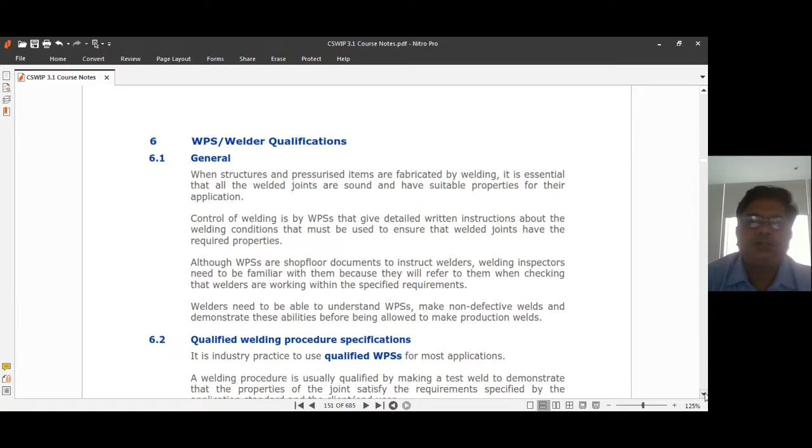So this is our controlling document. We will see all the current requirement, voltage requirement, all the ranges where the input heat calculation - everything will be as per this document. So we will refer to this document for any kind of welding being done by the welder. And also the welder, if he has any doubt, he has to refer to this document to understand about the welding requirement.

So, qualified welding procedure specification - this is the WPS we are talking about. The WPS and PQR are two different documents. You must understand that first - the mother document is the PQR, which the welding engineer will make before the project starts. So before the project starts, the welding engineer will go through the MTO, the material takeoff of the entire project, and understand what grades are mentioned there, what thicknesses are mentioned there, and based on that, he will come up with the PQR list.

So in this list of PQRs, if there are 10 PQRs required, 15 PQRs required, 25 PQRs required for that project, he will make a list of that. Then he will make a list of the PQR material that is required. And of course, you can see my earlier video on this, I have explained it in very great clarity.

So as is the practice to use the qualified WPS for most applications, one PQR may have 10 WPSs supporting that PQR. So this is what the welding engineer or welding inspector learning CSWIP 3.1, 3.2 need to understand: PQR is the mother document that is tested in the lab. Once that PQR is approved, the welding engineer, within that parameter, within that range, can come up with 3 or 4 WPS suitable for welding application on the shop floor, depending on what they are welding.

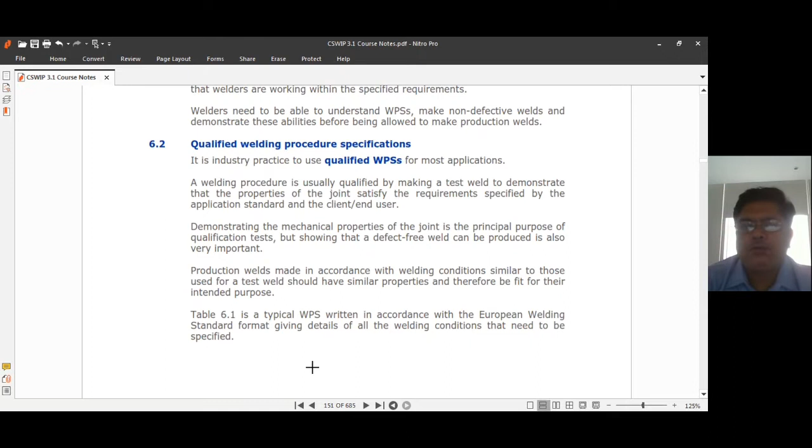And if it is ISO standard, they know what format is to be followed. They know where the current will be, where the heat treatment will be written, where the PWHT will be written, where the gas is mentioned, so it becomes easy and quick. So if every company has their own format, the format is very important for quick finding on the shop floor.

So let's see this typical scope, how it happens: the typical sequence of the welding procedure qualification. So he's talking about welding procedure qualification. PQR is procedure qualification record, so don't confuse yourself with welding procedure specification and procedure qualification record. When we are talking about PQR, it's the procedure we are qualifying, and after the qualification of the procedure, you can have many welding procedure specifications from that PQR.

So the welding engineer writes a preliminary WPS, we can say preliminary PQR, for each test coupon to be welded.

We usually call it PWPS because before it becomes a PQR, it is in the form of a PWPS. The welder makes a test coupon in accordance with the PWPS. The welding inspector records all the welding conditions used to make the test coupon, which is the as-run condition. What current you used, what voltage you used, every pass, root pass to hot pass to fill and cap, every pass we are taking the run sheet.

If you see a typical run sheet, I will just post it here so that people will know exactly what a run sheet is. It's a very, very difficult job. We have to stand there till the complete welding is finished, and the welding inspector, with the help of a tong tester and a digital temperature monitor, will monitor the conditions of the welding. People usually prefer CSWIP 3.1 candidates for such a task.

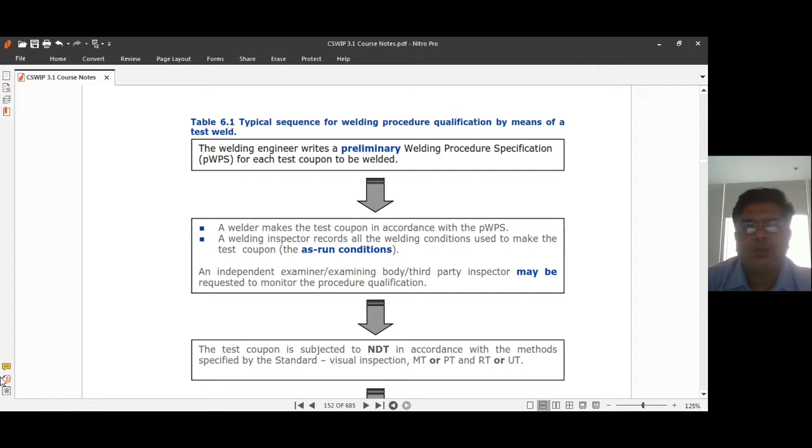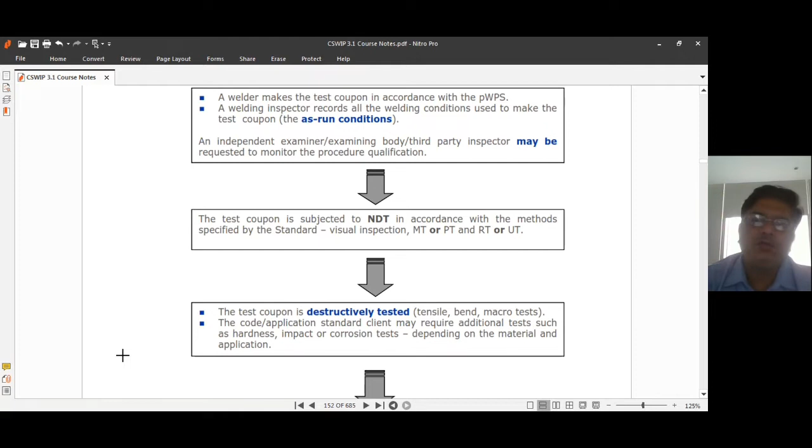Once that sheet is recorded, the test coupon is subjected to non-destructive testing first, and then it goes to destructive testing in the lab, which you have seen in chapter 4. The test coupon is destructively tested: tensile, bend, macro, impact, Charpy impact, depending on the requirement of the codes and standards and the client application.

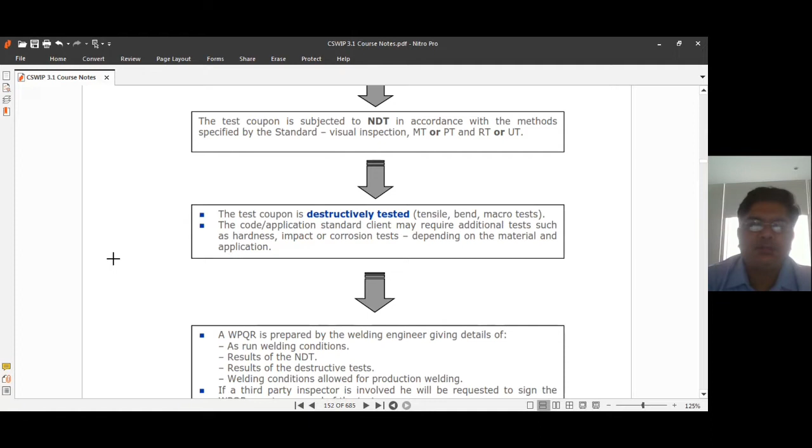It is tested. If the PQR is passed, then the PQR is prepared by the welding engineer, and it has all the information attached to it. For example, what electrode you used, the MTC of that, the material certificate, the material of the piece welded, that steel MTC. Then it will have the gas certificate, if you used any gas. Then it will have the lab tested results attached, and the NDT reports which were done for that will also be attached.

In this one aspect I want to make it very clear, for our past lesson learned: if you are doing an AWS PQR and if you are doing a 15614 PQR, these two are different standards. When an AWS PQR is being qualified, you must ensure all the AWS standards are mentioned in all the reports. So what happens sometimes, by mistake, the PQR is done, and the NDT report comes out in AWS standard, where the PQR is of 15614 ISO standard. Then there is a very grave mistake, and the client can also say you guys don't know the standard, or what you are doing, you don't know.

This happened even in some cases in the companies I worked. We saw that the PQR NDT reports, and sometimes even the lab reports, are not matching with the standard. So once the PQR is made, you must have clearly checked each and every clause of the NDT reports properly. It has to be on the same standard which we are looking to make the PQR.

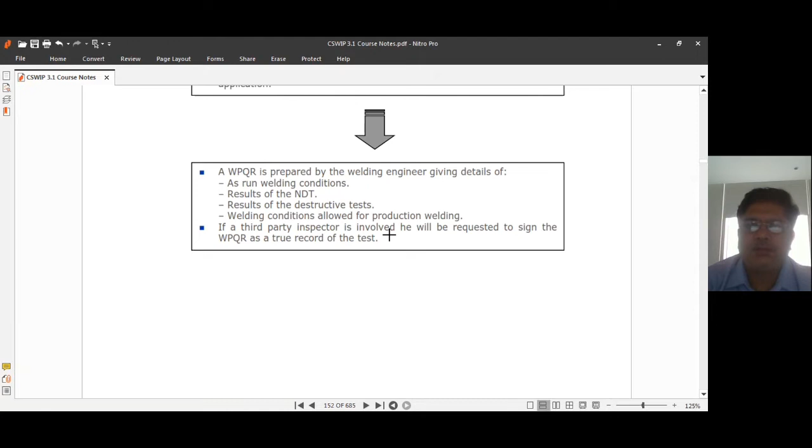The third party inspector who is involved, apart from our inspector, will also be witnessing all the testing, and he will also sign off on the PQR, and that is very important because many times it is asked. Also, I will have to explain the third party involvement here.

There are many types of third party involvement. If somebody is dealing with the shipping industry, then the marine class is involved. In this case, DNV Marine, ABS Marine, Lloyd's Register marine side are involved. Usually the PQR which we are doing for the shipping industry, for marine side, is actually having more cost than the normal industrial standard which we are doing for AWS D1.1. So usually in marine, class standard is also involved, and also AWS is involved.

So you will have to write this dual class in your WPS/PQR itself during the testing. Why I am saying this is, when a marine class PQR is qualified, you can use that in industrial as well as marine. Whereas when you qualify only with AWS standard D1.1, and if you want to use that on any marine projects, you cannot use it. This is very important information which I haven't seen in any video done by anybody. I just want to tell you guys, these are the various nuances in the industry.

For example, you have a project where there is no marine involvement, and you do a PQR with AWS, your client is happy, that project is finished. Then comes marine, you want to build a vessel or something like a small ship, then that PQR you cannot use for the marine class. The project will not allow you, because first of all, the third party involved will not be marine who is signing off. He will be from an industrial background, and that is not approved by the marine class surveyor.

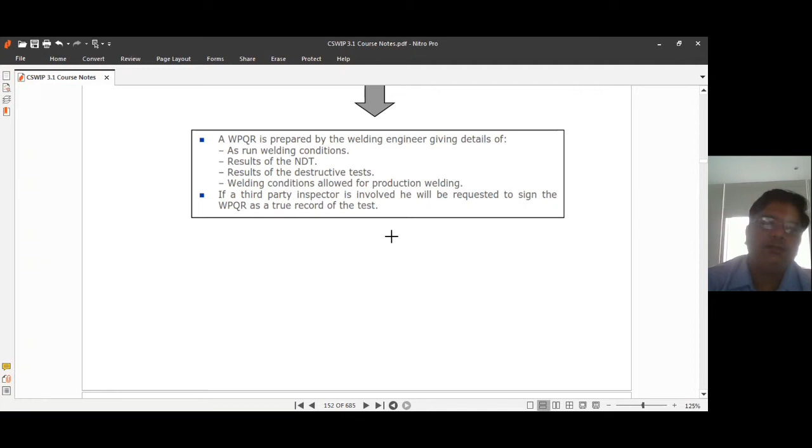Welding standards for procedure qualification, European and American standards have been developed to give comprehensive details. We will come out with a video explaining the PQR with respect to AWS D1.1 and ISO 15614, where a welding engineer will come online and explain the difference between these two. With respect to standard, if different tests are involved or any NDT is different, what clause exactly needs to be followed, we'll come up with another video on that, because that will be a standalone video in itself. I don't want to mix these things up because the video length becomes too much to handle.

So how a welded test piece must be made to demonstrate joint properties, how a test piece must be tested, which welding details need to be included in the WPS, then the range of production welding allowed by the particular qualification test weld - all this will be in the standards.

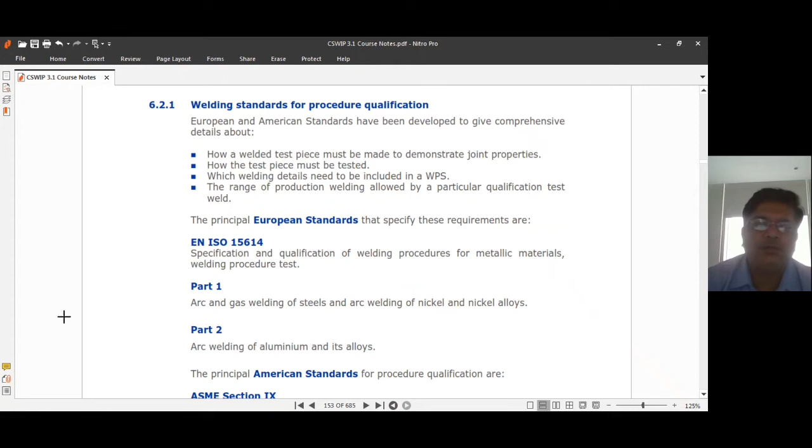The principal European standard that specifies this requirement is 15614, as I've already been telling you. This standard you need to study in great detail, because when you go to the job, this standard is now the most widely used after AWS D1.1. So any European projects that come will insist on 15614. If you write AWS D1.1 instead, probably they will not accept that PQR.

Many times I have been asked whether I can write AWS also and 15614 also. Well, what happens in this case is very complicated. If you want to make a PQR that satisfies both 15614 and AWS standards, the NDT must be done in both standards, the testing must be done in both standards, and the person witnessing needs to be a notified body for the European ISO standard, whereas in AWS I think he can also sign off. So this is the nuance between the PQRs.

Of course, yes, you can develop it, but additional tests will be required. You will end up doing two test pieces instead of one, because obviously the test specimens cannot all be taken from one piece alone. So anyway, the cost is going to double, but this cost exercise the company must do.

But I have seen many AWS clients accepting 15614, whereas the ISO standard usually doesn't accept AWS. This is the nuance in these kinds of things, one needs to understand that. I've seen many videos on this topic, but no one covered this particular aspect, and it's a very critical aspect in this industry.

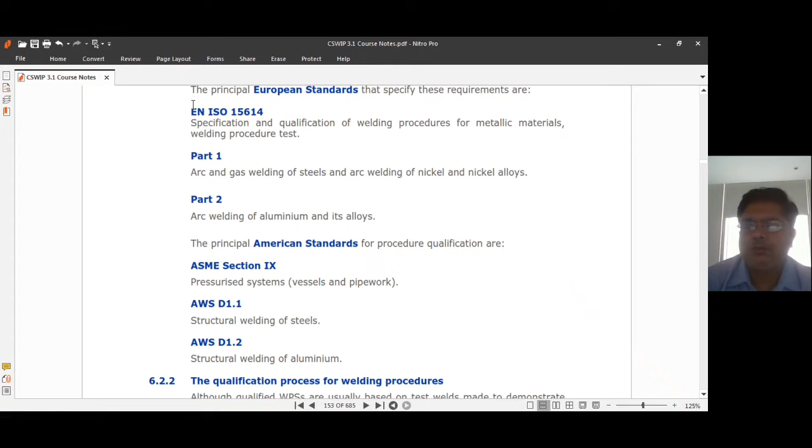Then D1.2 is the structural welding code for aluminum. Mostly not used in my industry at least, but I have a small experience in doing welding of aluminum vessels - small vessels. When I was in Dubai Dry Docks, we used to make aluminum vessels. So that is a small part of my career where I have some experience of that.

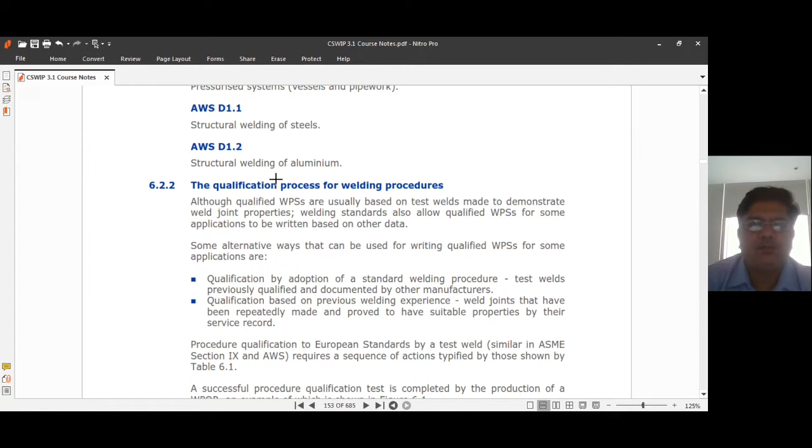Let's see the qualification process for the PQRs. Although qualified WPS are usually based on test welds made to demonstrate the welding joint properties, welding standards also require or allow qualified WPS for some applications to be written based on other data. What does this exactly mean? We will go through this.

Some alternative ways that can be used for writing qualified WPS for some applications are: qualification by adoption of a standard welding procedure, using test welds previously qualified and documented by other manufacturers, and qualification based on previous welding experience, where a welding joint has been repeatedly made and proved to have suitable properties by its service record. What do these two items mean? There is a lot of confusion in the industry about this.

Welding engineers of a company need to have a PQR of that company. You cannot use the PQR done in another company or another owner in your company, because that is not allowed as per the code. The code says every company must have their own PQR and WPS, which must be done at that site. It must be tested in the lab, and only then it becomes company property.

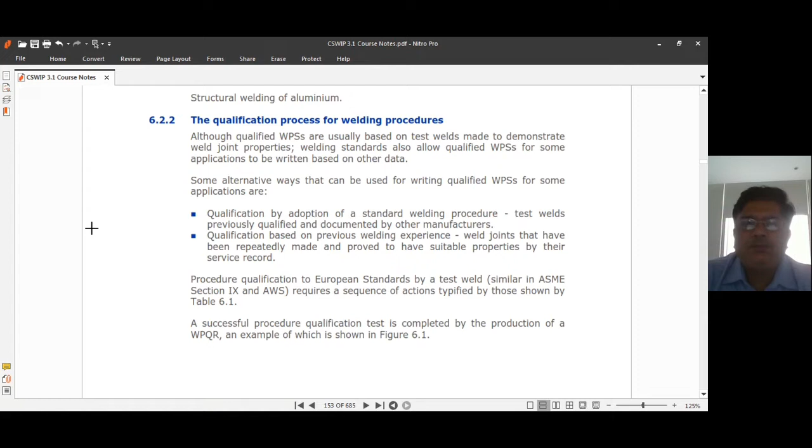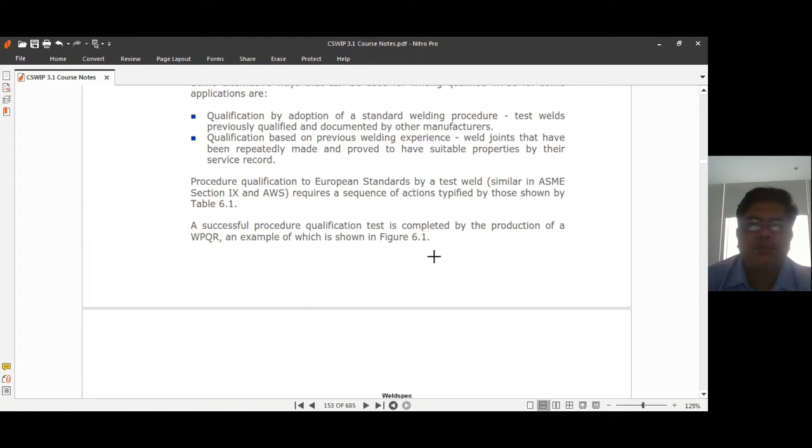Procedure qualification to European standard by a test weld, similar to ASME Section 9 or AWS, requires a sequence of actions typified by those shown in table 6.1. We will have to run that sequence. A successful PQR is completed by production of a PQR, WPQR, as an example shown in figure 6.1. What we saw in 6.1, that matters.

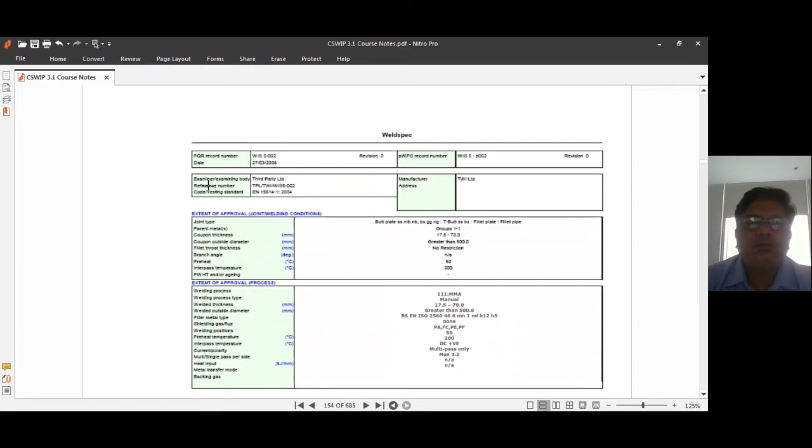So PQR record number - this is a typical PQR which anybody must have seen. It will have the PQR number, most important, because on the shop floor we always talk in terms of WPS and PQR number, revision number, date of when it was run, third party involved, reference number, and codes and standard, the most important.

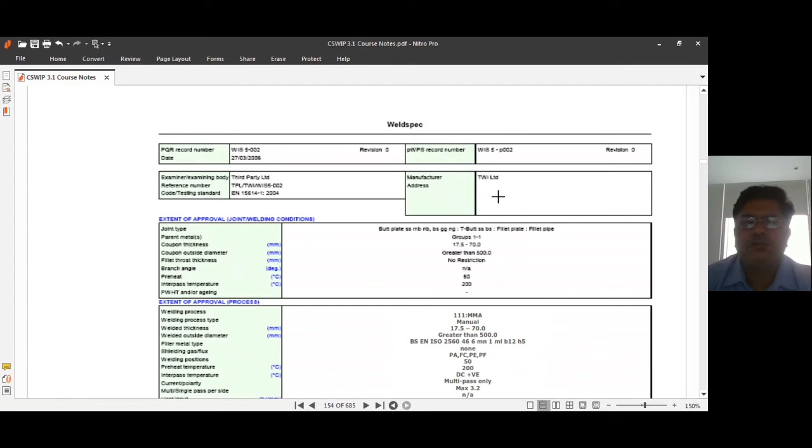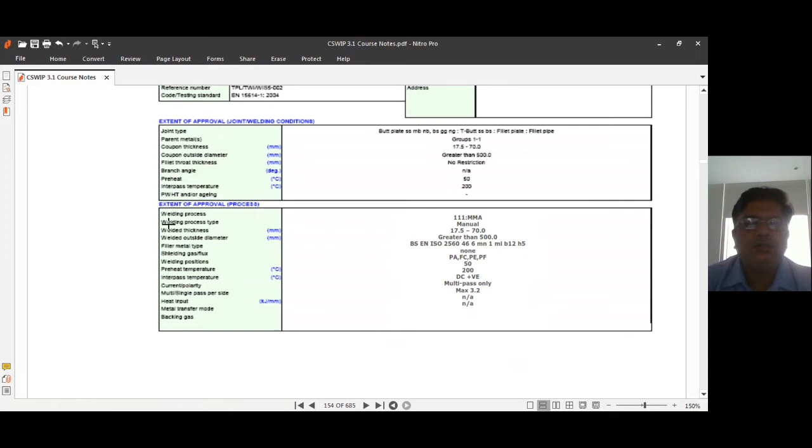Then the address of the location where the company is situated, the joint type, parent material, coupon thickness, outside diameter - all this you will be mentioning. As per AWS and 15614, you have got a format for this, and that format should be used.

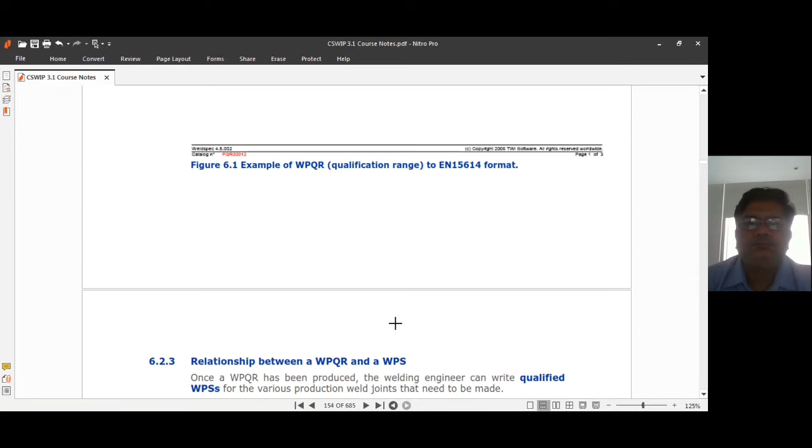So the relationship between PQR and WPS, as I spoke to you - once a PQR has been produced, a welding engineer can write a qualified WPS, which he has to sign, and the third party has to sign, or in many cases the third party may not sign, but it has to certainly be approved by the client before you start welding on that WPS, for various production joints that need to be made.

The welding conditions that are allowed to be written on a qualified WPS are referred to as the qualification range, depending on the welding conditions used in the test piece, as run details and forming part of the PQR. Whatever you run in the specimen in your lab during welding, the range of current and voltage you take for qualification will come on the PQR and WPS. Ultimately, the welder has to abide by that.

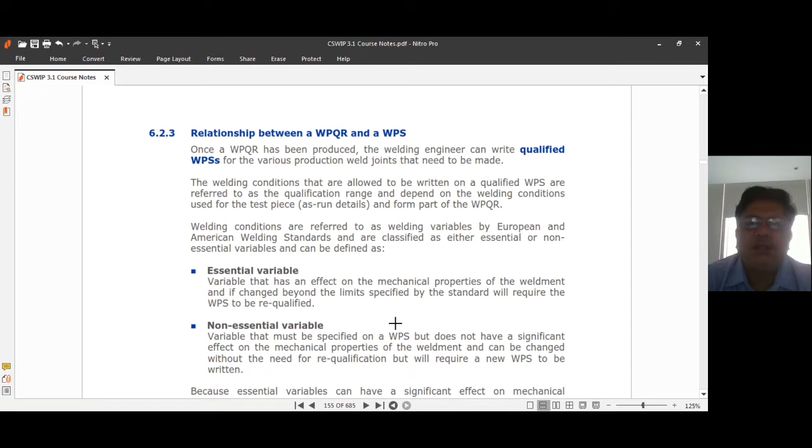The welding conditions are referred to as welding variables by European and American welding standards and are classified as either essential or non-essential variables. Essential and non-essential variables are a very important aspect of the work - this defines the boundaries under which the welder will work. An essential variable is one that has an effect on the mechanical properties of the weldment, and if changed beyond the limit specified by the standard, will require the WPS to be requalified.

So what happens sometimes on the shop floor, we find that the welder has made some mistake. If it is an essential variable, the client will ask to open an NCR and qualify this procedure so that if it passes, that weld will be okay. Otherwise, that weld will have to be cut out.

So there are many essential and non-essential variables. An inspector must know this by heart, because it is the most asked question during interviews, and there are many technical, fine details about essential and non-essential variables. As per the codes, there is a table for essential and non-essential variables that you can refer to for the welding process and even for welder qualification.

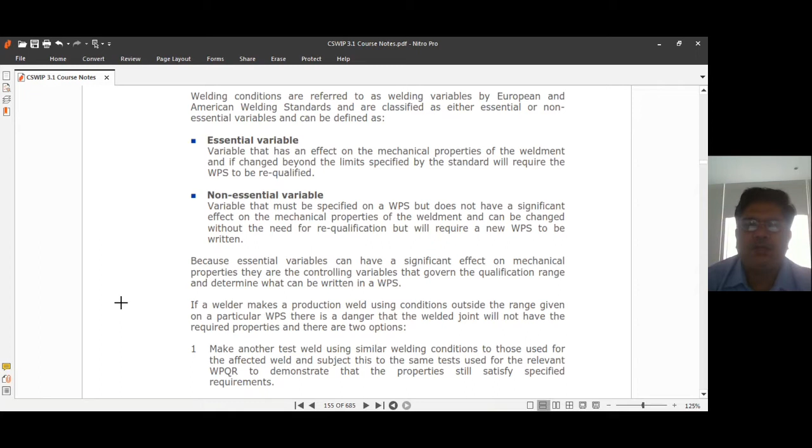A non-essential variable must be specified in a WPS but does not have a significant impact on the mechanical properties, and the welder can change it depending on the situation. So the weldment can be changed without needing requalification. Any changes in that, the WPS will not be required to be requalified, so it will be a safe operation.

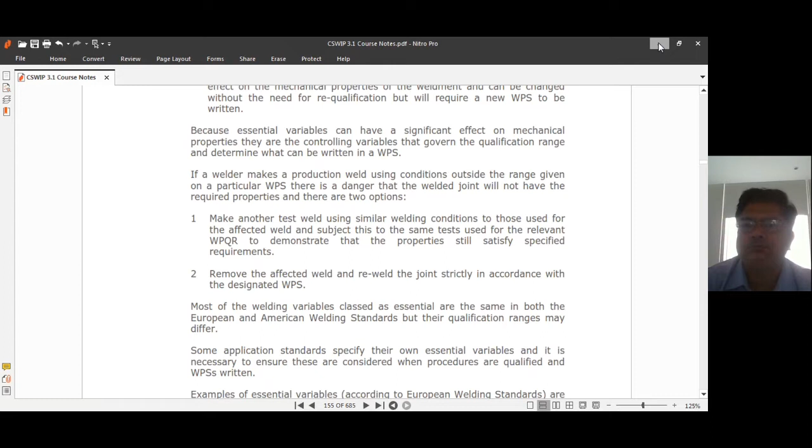Because essential variables can have a significant effect on the mechanical properties, they are controlling variables that govern the qualification range and determine what can be written on the WPS.

If a welder makes a production weld using conditions outside the range given on a particular WPS, there is a danger that the welded joint will have different properties than required. So there are two options: make another test using conditions similar to those for the affected weld and subject it to the same test using the relevant WPQR to demonstrate the properties still satisfy the specified requirement.

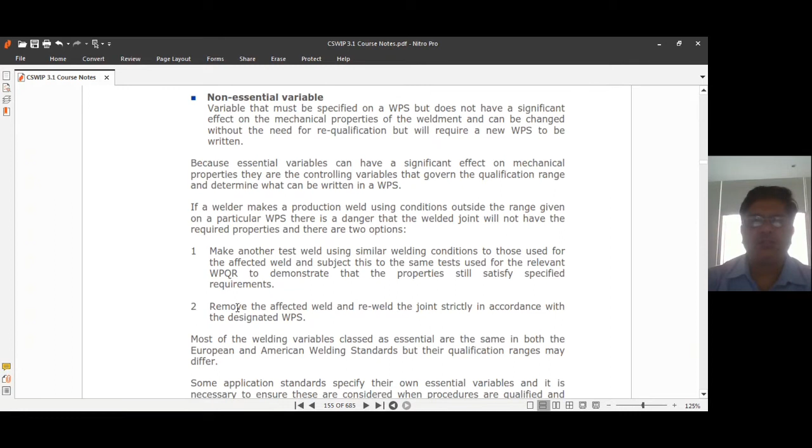I told you that in case the welder welds something beyond the required parameters, then the welding engineer will have to make another PQR with the same conditions and get him qualified.

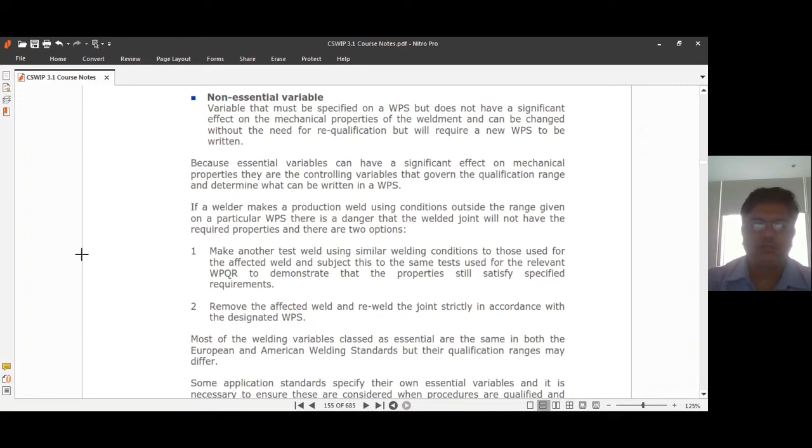In our company, for example, this happened: instead of 6G R welding, the welder was qualified for 6G and he did 6GR welding. So naturally we tried to get him qualified for 6GR by giving a coupon. Then he got approved, and that weld also got approved, but it was still an NCR. So naturally you'll have to understand all this. Otherwise you'll have to remove the affected weld and re-weld the joint according to the conditions of the WPS and make sure the NDT passes.

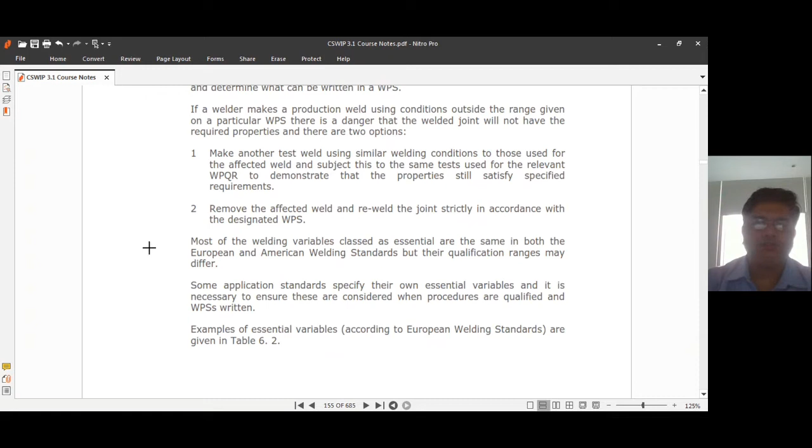Most of the welding variables classed as essential are the same in both the European and American welding standards. Almost both are unanimous that they have the same essential variables, but their qualification range may slightly differ because the standards are different.

Some application standards specify their own essential variables, and it is necessary to ensure these are considered when procedures are qualified and the WPS is written. So if you want to use an AWS qualified PQR for some other standard's welding, you must ensure the PQR and that standard have the same essential variables. Otherwise, the PQR will not be accepted for that standard.

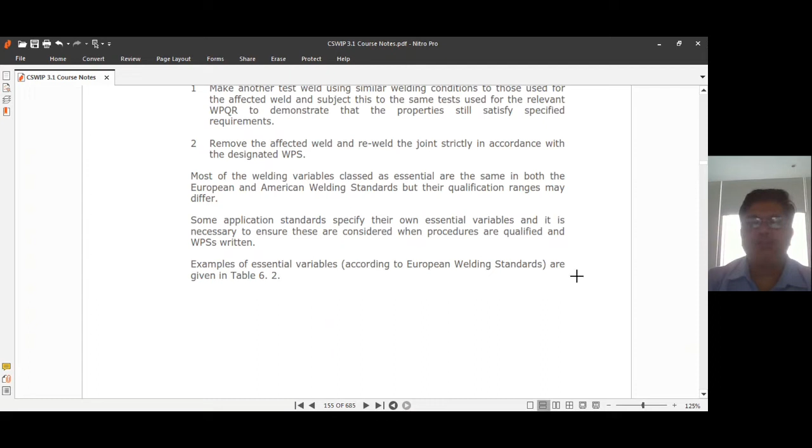Example: essential variables as per the EWS, the European Welding Standard, are given in section 6.2. This covers the welding process - no range since the process qualified is SMAW, TIG, or FCW.

For PWHT, a joint tested after PWHT only qualifies PWHT production joints. A joint tested as-welded only qualifies as-welded work. So 'as welded' means if you don't do any PWHT, it will be qualified only for normal welding. If you want to qualify a PQR with PWHT, you will have to do the PWHT, then do the non-destructive testing, and then your PQR will be qualified for PWHT also.

If you are doing a PQR and then doing PWHT after that job, but that PQR does not have PWHT, then it becomes an essential variable issue, and you are doing something wrong. So I hope you understand this condition.

Parent material type is also very, very important - the P numbers are very important. Parent material of similar composition and mechanical grouping properties, having the same mechanical group number, qualifies and only allows production welding of material with the same group number. If the P number and group number match what you have welded, you can refer to the table in the ASME which explains this precise condition.

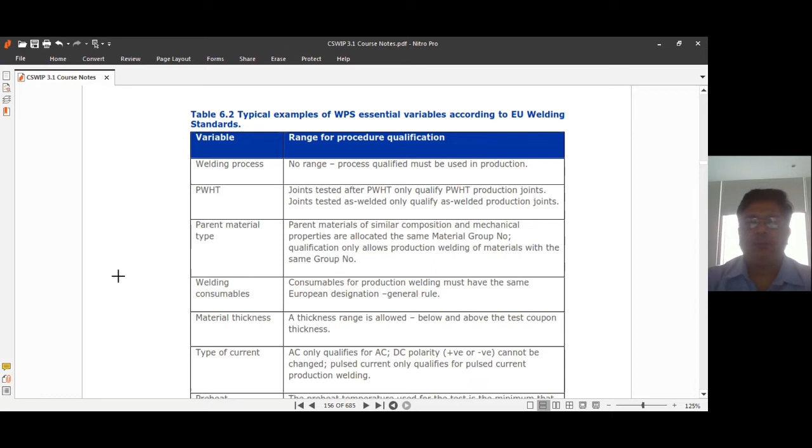Welding consumable for production weld must have the same European designation. So that is another important thing, that the welding consumable must be the same.

Material thickness, also the material thickness range allowed, you will get to know from the standard. Type of current - here also the polarity is very important. Polarities are an important factor. If you want to change the polarity of the electrode, then obviously it will be an essential variable.

Preheat temperature is very important - whatever preheat you have given in the PQR, you must apply the same in the production weld. Then interpass - the interpass range of temperature is also very important in this essential variable, and the heat input. When impact requirements are required in your code and standard, the maximum heat input allowed is 25% above the heat input, and when hardness requirement applies, the minimum heat input allowed is 25% below the heat input. These two things are essential.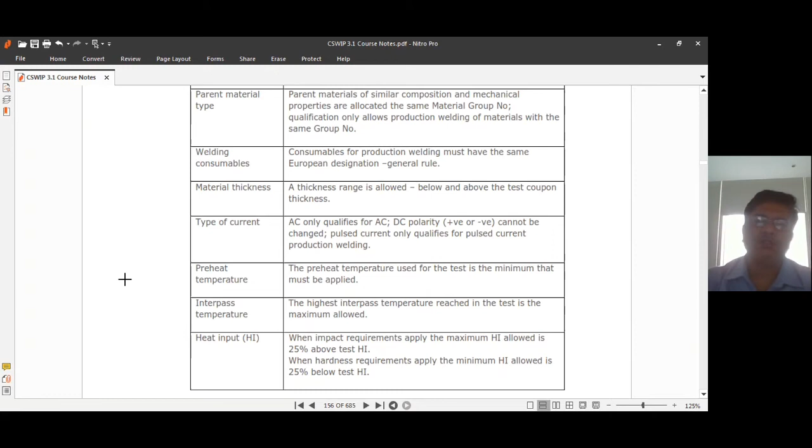Let's go to welder qualification now, which is equally important as the PQR qualification. One must understand the difference: you are qualifying welders based on one PQR or many PQRs, but the PQR standalone has a different procedure requirement of qualification, whereas welders can be qualified based on any PQR, because for the welder it is not important which PQR he is qualified on, but the process.

So for him, if there is a TIG process, you can use a TIG PQR. If you are welding SMAW, you can use an SMAW PQR.

So the use of qualified WPS is an accepted method for controlling production welding, but it is only successful if the welder understands and works according to it. The welder needs skill to consistently produce sound welds. Welding standards will have to be developed to give guidance on test welds required to show that the welders have the required skill to make certain types of production joints.

So as we brought standardization in PQR, the same way welders qualification is also a standardization process, so that all welders qualified for that PQR for that process give a standard type of welding. So this is to test that.

I must remind here that the welder qualified is only approved for 6 months. So you must understand, if he is not doing any welding in that 6 months, then he'll have to undergo a new fresh qualification.

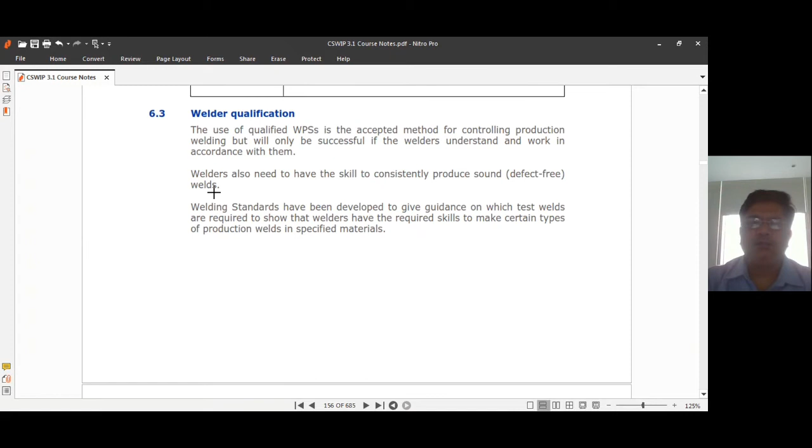So many times what happens, the welder will go on vacation or leave the job, and sit home for a year, and then if he comes back to work, naturally his qualification is not valid. You will have to retest him with a new test piece and redo the whole process.

So welding standards for welder qualification - which are those? Those are different from 15614. Let us have a look.

As per the ISO standard, 9606 is the preferable code for qualifying welders for fusion welding. Part 1 is for steel, and 9606 part 2 is for aluminum.

EN 1418 covers welding personnel approval testing of welding operators for fusion welding and resistance weld setters for fully mechanized and automatic welding. So this is with respect to automatic welding, we are using that standard.

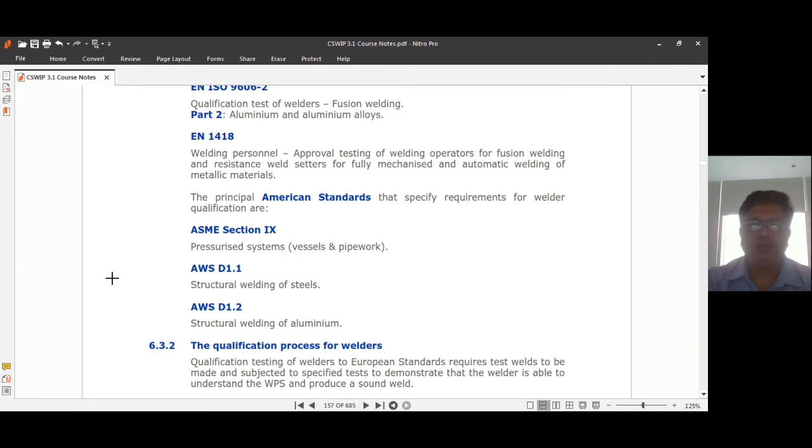The principal American standards required are D1.1, and ASME section 9 is used for piping and pressure vessels. So it's very clear that structural is AWS D1.1, and if you want to do piping or pressure vessel, you have to go to section 9. ASME section 9 deals with welder qualification.

Whereas in the ISO standard, there is nothing like that - if you do 9606, it can be good enough for any kind of welding.

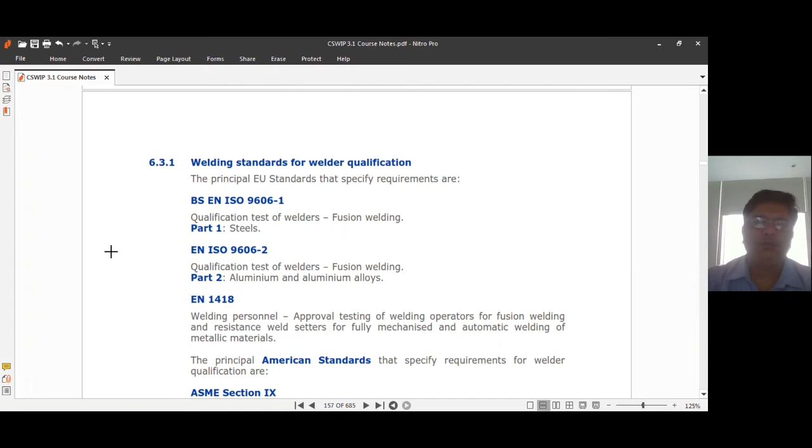Let us see the qualification process: qualification testing of welders to EN standards requires a test weld to be made and subjected to specified tests to demonstrate that the welder is able to understand the WPS and produce a sound weld.

For manual and semi-automatic welding, tests demonstrate the ability to manipulate the electrode or welding torch. For mechanized and automatic welding, emphasis is on demonstrating the ability to control a particular type of welding equipment. The American standard allows welders to demonstrate they can produce sound welds by subjecting their first production weld to non-destructive testing, which may be RT or UT.

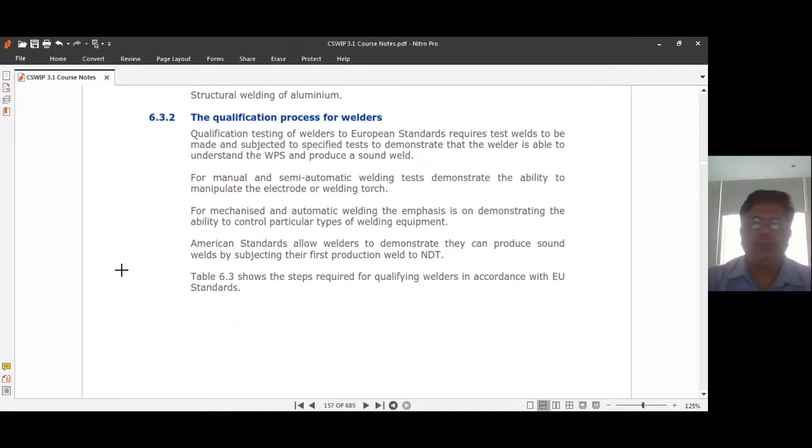So table 6.3 shows the steps required for qualifying a welder according to the European standard.

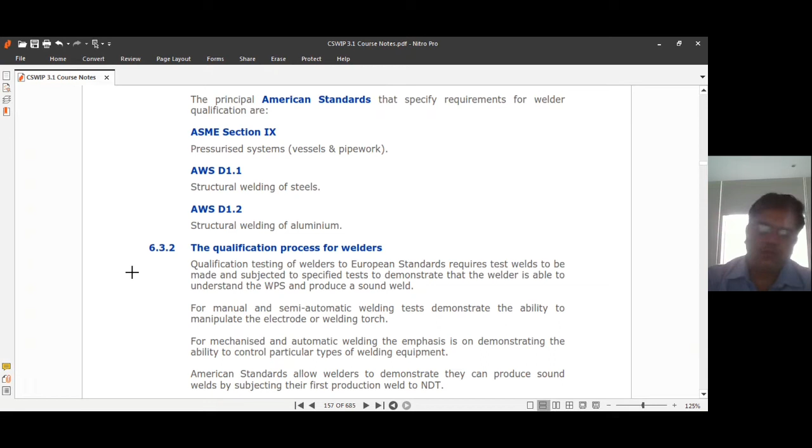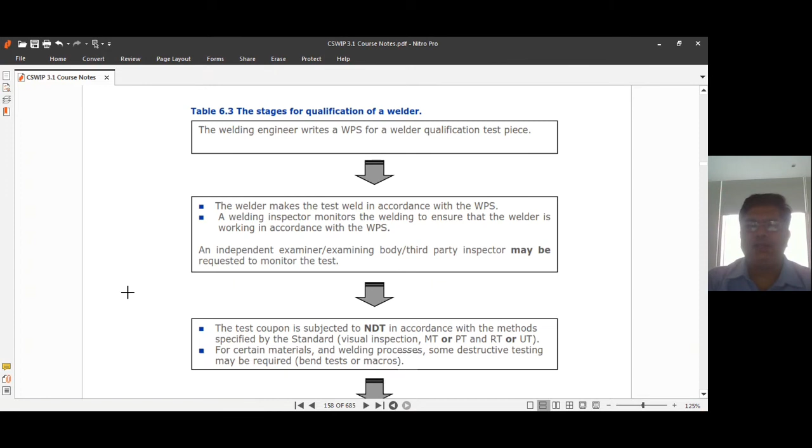So the welding engineer writes a WPS for a welder qualification test piece. Then the welder makes a test according to the WPS and the range. The welding inspector monitors the welding to ensure the welder is working according to the WPS, whether he is doing preheating, interpass cleaning, interpass temperature, current and voltage settings, and the essential requirements, essential variables. So all that he will check, and then an independent examiner, a third party, will be witnessing all this.

Then the test coupon is subjected to NDT in accordance with the methods of RT, UT, or MT/PT. Then for certain materials or welding processes, some destructive testing may be required, like bend test, macro, fillet joint macro, and bend test. As I said, Aramco requires bend test. So a welder qualification certificate is prepared showing the welding conditions used for the test piece, and the range of qualification he is allowed.

On the back side of that WQT page, there will be his extension. So every 6 months, the welding engineer and third party will sign on that sheet. If a third party is involved, they would endorse the qualification certificate as a true record of test. So not only the front sheet will they sign, but on the back side every 6 months they will sign.

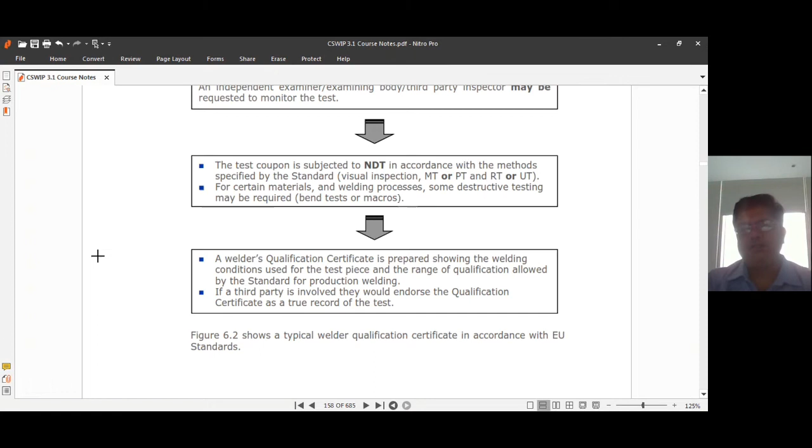So in a typical WQT, you can see the test material and spec, what he has welded, to what - plate or pipe, what grade, then joint design, backing - with backing or without backing. To understand, backing can be gas, backing can be a plate, backing can even be a welded root pass. These three important aspects every welding engineer must keep in mind - that backing means something from the back.

So this can be three conditions. Either you can use backing gas, like in the case of stainless steel. You can use backing material, for example, if you put a 2mm plate behind the root pass and start welding the root pass, and that backing strip will always remain there forever if your design allows that. Then the third condition is if somebody - 6GR will do the root pass, or 5G will do the root pass,

and some other welder comes and does the hot pass, filling, and capping - then that is also considered that the welder is qualified only with backing. That means that welder will not be able to do root pass welding. This is a very, very important aspect of this. So you must consider that in knowledge for this particular welder qualification.

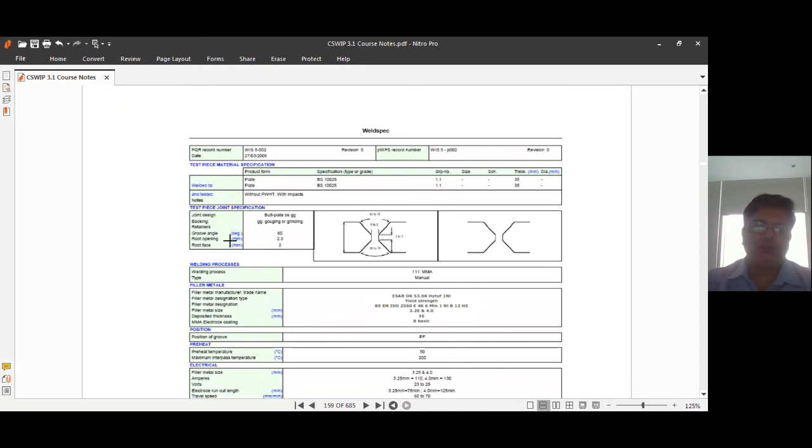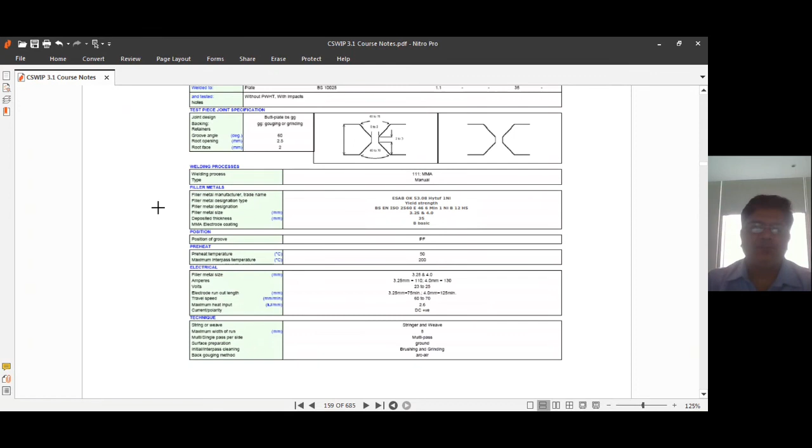Groove angle, root opening, and root face - these all have ranges. You can specify a range if you want in your PQR. Then the welding process, of course, is the essential variable here. Then the F number, which is written with respect to filler material designation, size designation, type, trade name - it may be ESAB, or Miller, or whatever. Then position - what position is qualified, preheat as per the PQR/WPS, and all the electrical characteristics like filler material size, amperes, voltage, runout length, travel speed, heat input - everything is mentioned in this document.

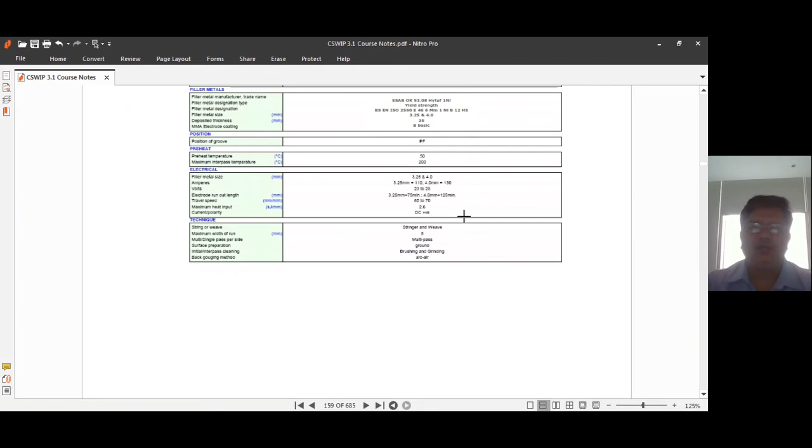Let's proceed further - welder qualification and production welding allowed. So the welder is allowed to make production welds within the range of qualification, as we already know. The range of qualification is based on the limits specified by the welding standard, or for the welder qualification essential variables. Defined as a variable that, if changed beyond the limit specified by the Welding Standard, may require greater skill than has been demonstrated.

So he's telling us that if essential variables of welding go beyond that, it means the skill has changed - greater or lesser - so he will have to get qualified again. Some welding variables classed as essential for welder qualification are the same type as those classed as essential variables for PQR also. So for PQR there is essential variable, and for welder there is essential variable too. Many times they are almost the same, but the range of qualification certainly will be bigger in the case of the welder.

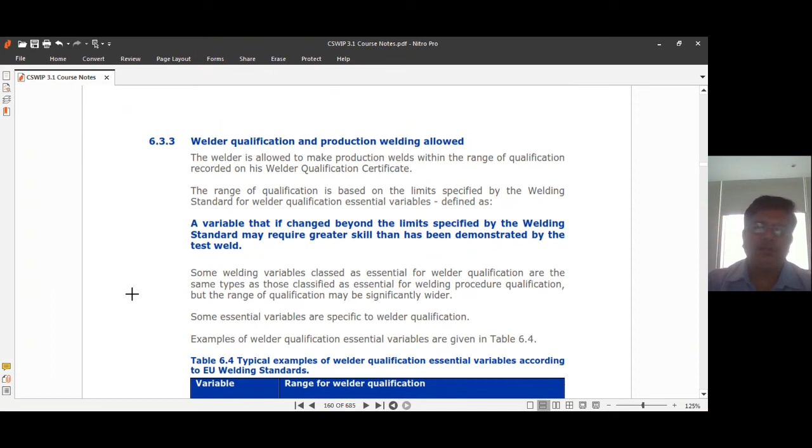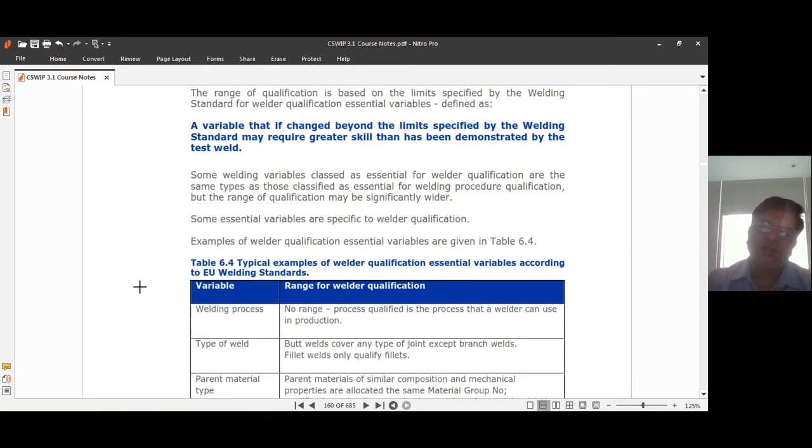Many times we have seen the welder, if he does more than 3 passes and more than 13mm, then he will be qualified to unlimited thickness. As you know, this is written in AWS D1.1. So the example of the welder qualification essential variable is given in 6.4.

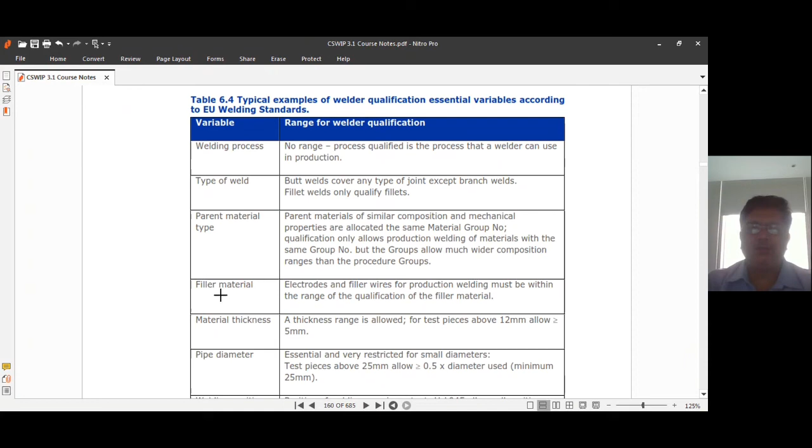So for the welder also, it's the same - welding process, type of weld, parent material type, filler material, material thickness, pipe diameter, and welding position. You have to buy into this - this will be very, very important for the rest of your life. You may be asked about it in innumerable interviews, and it will also be important when you go to site for observation purposes. So you have to remember these essential variables for PQR, WPS, and for the welder.

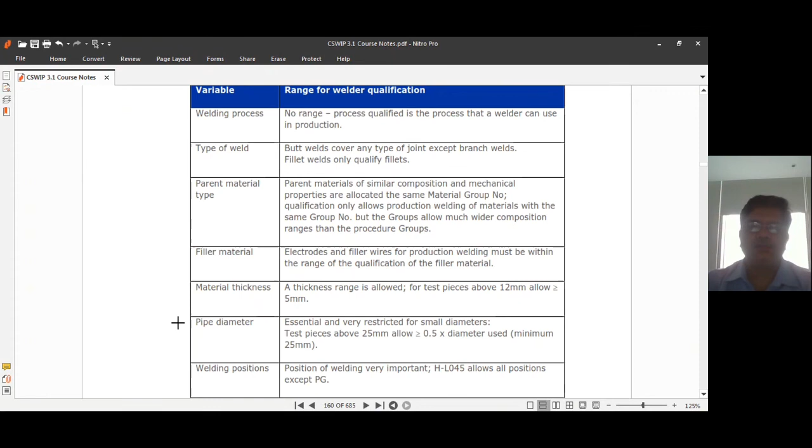The period of validity for a welder. Let us see the period of validity. As I said, that certificate needs to be confirmed every 6 months.

The welding engineer will confirm, looking at the database in the company, whether this welder was doing what kind of welding. Then he will sign off and ask the third party also to sign. Many a case, the third party's signature may not be important, but the third party will see whether the company welding engineer has signed or not.

Every retest is every 3 years. The chosen method of extension must be stated in the certificate at the time of issue, so the certificate itself mentions the validity. Retest every 3 years, validity for 2 years, provided that the welder is continuously working for the same manufacturer.

Also, the manufacturer must have the quality system as per ISO 3834-2 or -3. What is ISO 3834? It's a welding system certification which some company or factory has to take if they are executing ISO standard projects. For example, our company has EN 1090 standard certification, and along with that we have taken ISO 3834 certification also.

That certification is a separate topic, a separate video. How to do it and what to do to take that certification will be covered in a video we will come out with. That is for managers and above who are going to do qualification of their company's welding process as per EN 1090 and 3834.

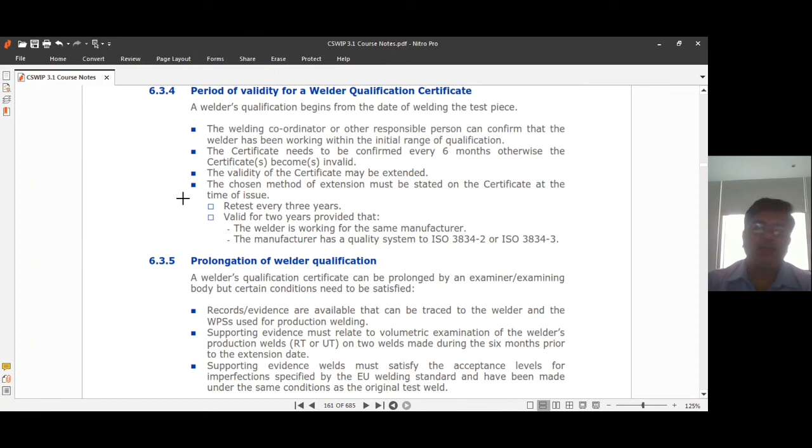Now, the prolongation of the welder qualification. The welder qualification certificate can be prolonged by the examiner or examining body, but certain conditions need to be satisfied. Records and evidence must be available that can be traced to the welder and the WPS used for producing the weld.

It's not just that the welding engineer is signing off; there must be some supporting document, like an RT or UT report, for that particular welder. Only then can the engineer say he was doing welding.

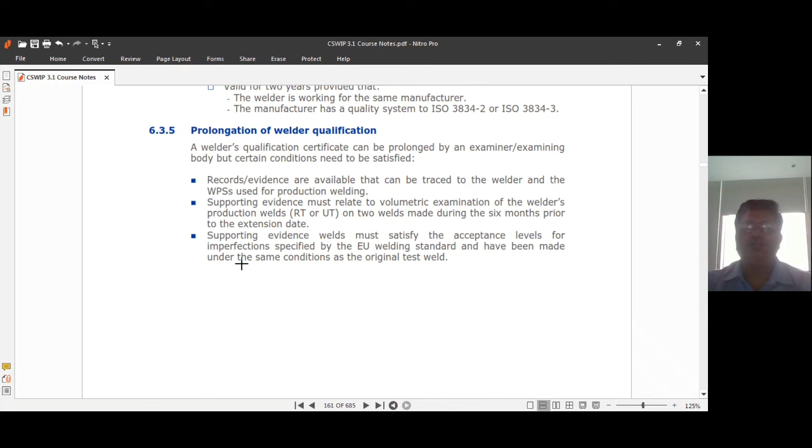So the supporting evidence weld must satisfy the acceptance level for imperfections specified in the EU or ISO standard, and it must be made under the same conditions as the original test weld. The position and all essential variables must be the same. Only then can he be considered continuously welding.

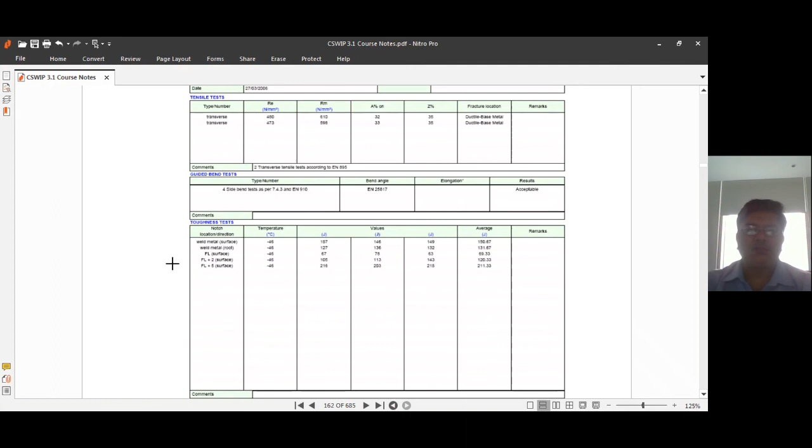These are the tensile test, transverse and guided bend test for doing the welder qualification. Then the toughness tests—this is for the PQR, I think, yes. It's for the PQR tests which are recommended.

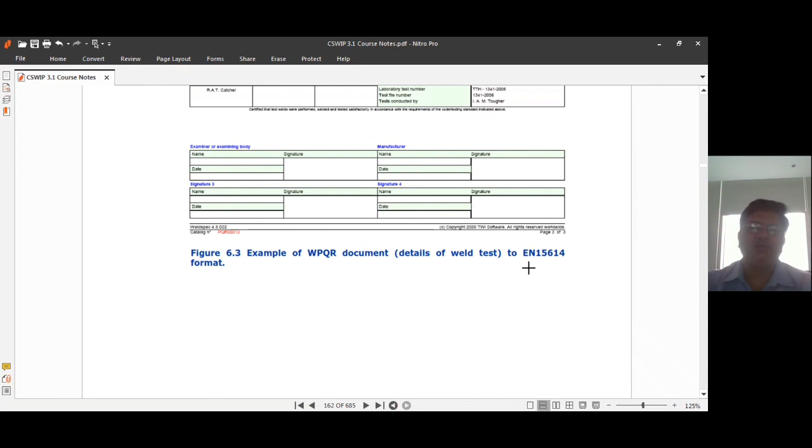Basically ISO 15614. This is the format for the test results, so the results will be written in that manner. And this is the welder's certificate where all the details are mentioned.

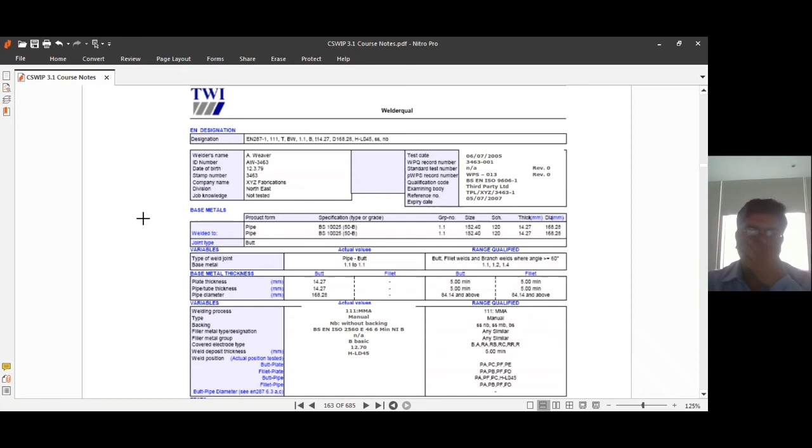Go through this line by line. You need to know what is written where.

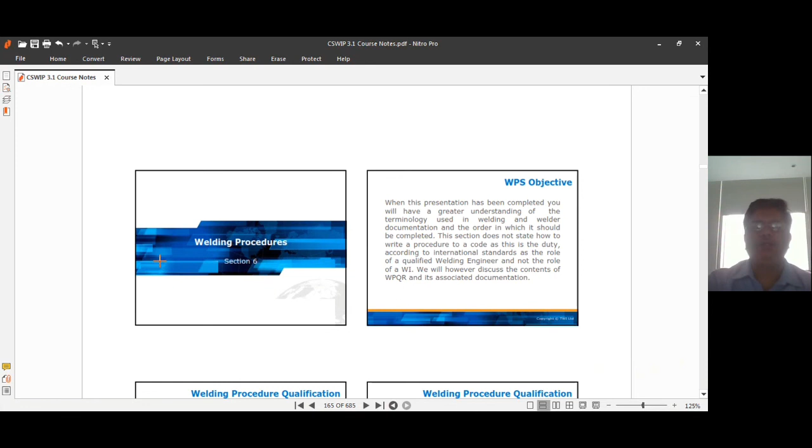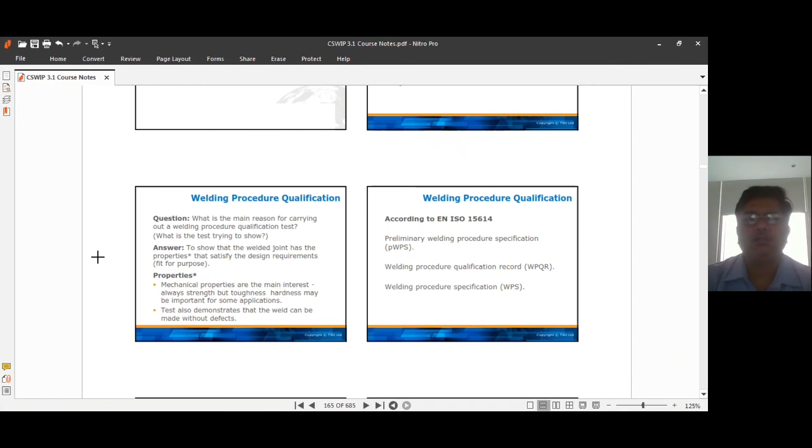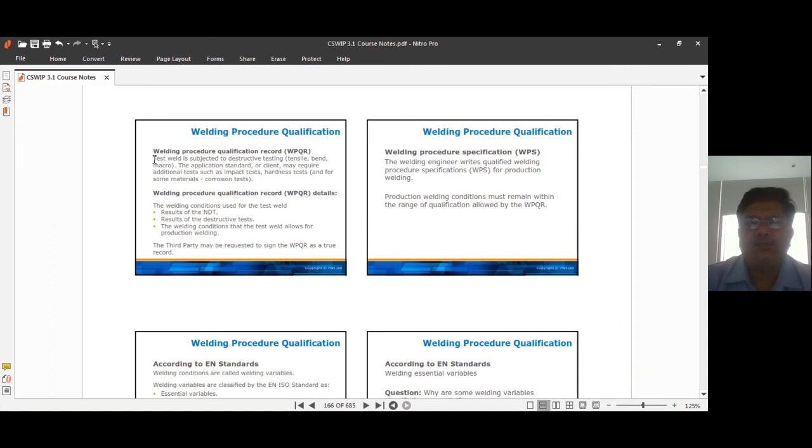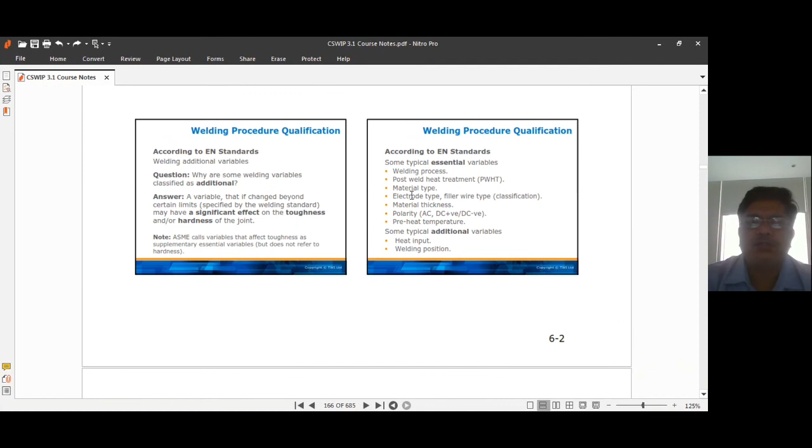With that, we have come to an end of the narrative part of this chapter 6. You can go through these slides, which give you information already covered, but it will be good for you to summarize this. Many times, these exact words are picked up verbatim and made into a question in CSWIP 3.1.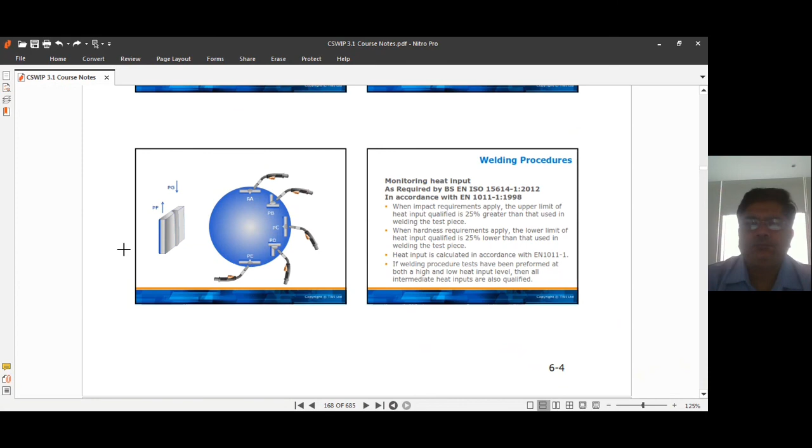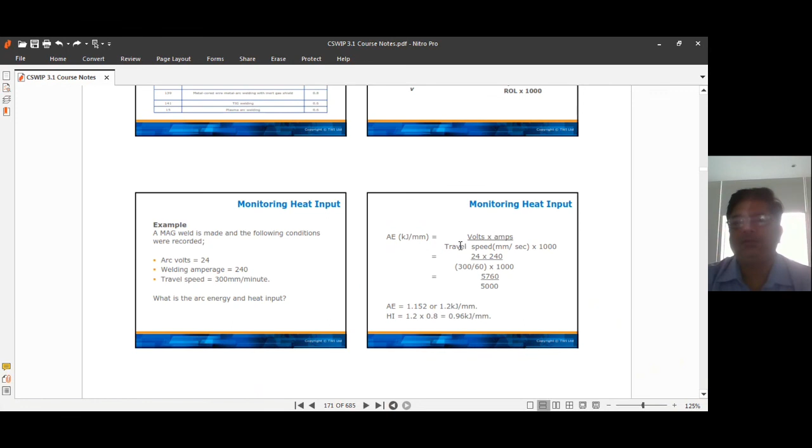So many times a 3.1 question will come from this material. The monitoring of heat input—every inspector must know this. There are calculations for this, involving amperage and so on. They may give you a question asking you to calculate the heat input.

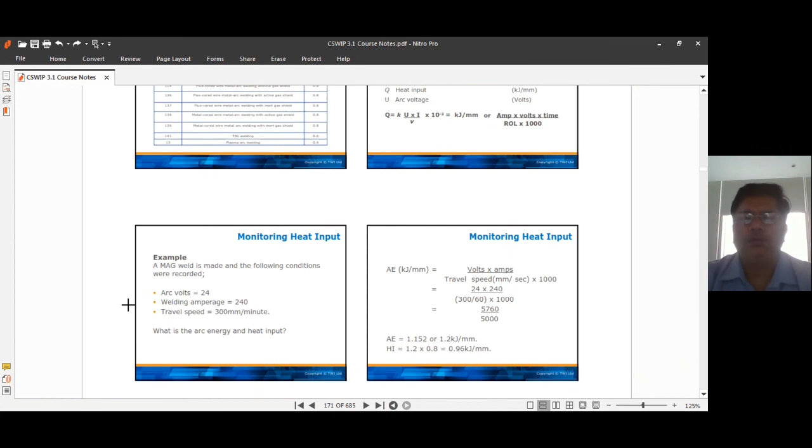So at that time you must know the calculations very well. You should practice this—very important. Do as much exercise as possible.

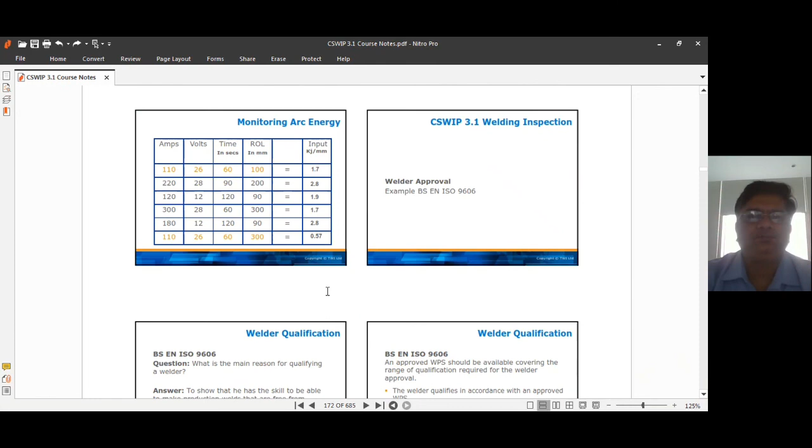With that, we conclude chapter 6. We will meet you back in chapter 7, which is material inspection—another very important and critical chapter for CSWIP 3.1.